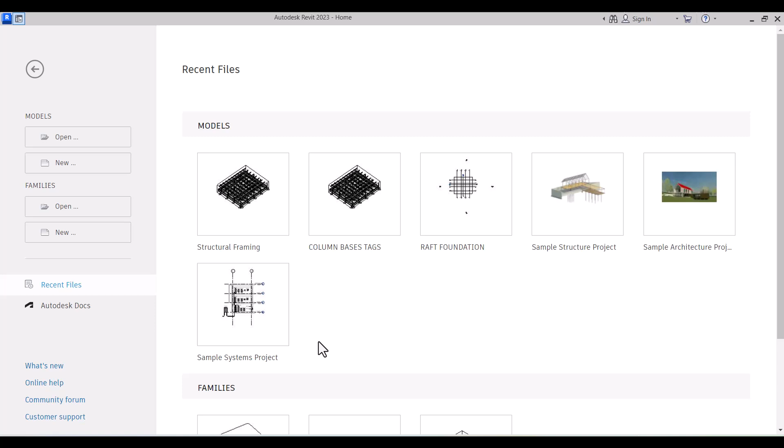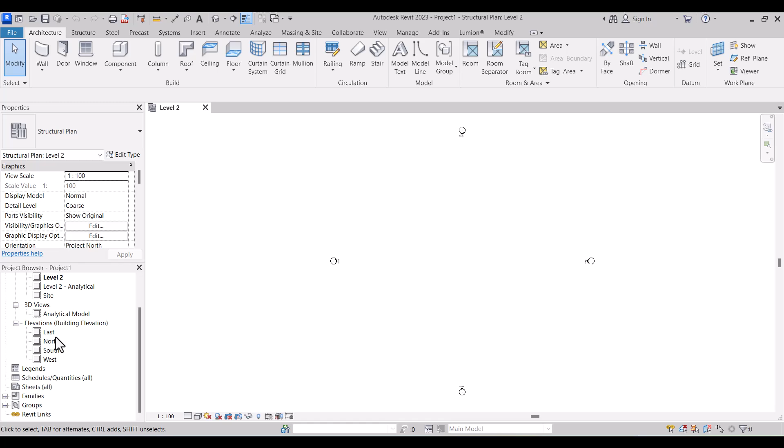Let's move right into our Revit tutorial to see what we have for you today. I'll start a new project using the metric template, which is the metric structure template. I'll click OK and let's wait for it to open.

As a default template, remember we have two levels created for us: level 1 and level 2. We assume level 1 is starting from the ground level, and level 2 is a suspended floor level, which can be a first floor or a mezzanine floor. Today we are going to create a level called the ground floor level.

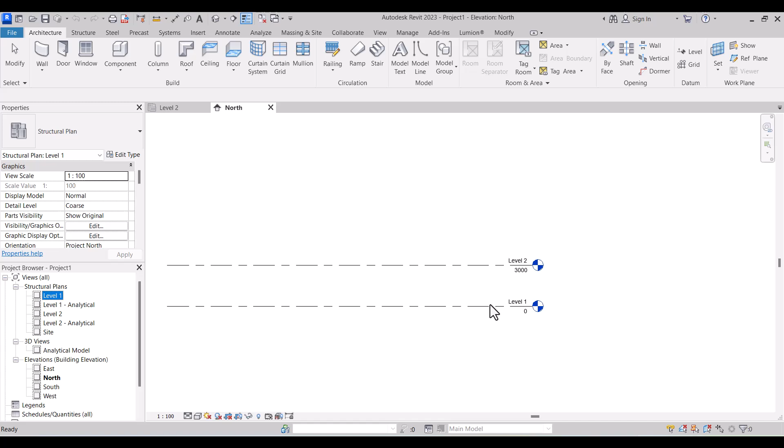So first of all, what is a slab on grade? Let me search this. Slab on grade - simply said, a slab on grade is a concrete slab in contact with the soil. When we talk about a slab or floor on grade, it's simply a floor which is in contact with the soil. We're going to do this and create a section so you know what I'm talking about.

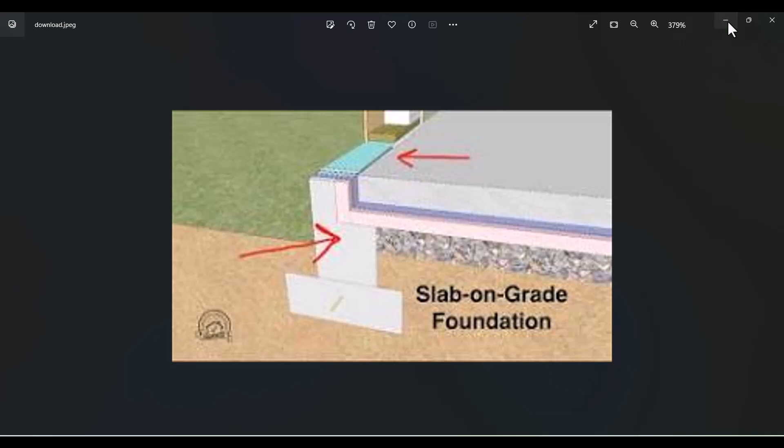Let me check - I have an image here I'd like to show you. So this is an example of a slab on grade with a foundation beneath it. Okay, the image isn't that clear, so I'll move on to create a similar thing in Revit. In case you have a project like this, you'll know how to do it.

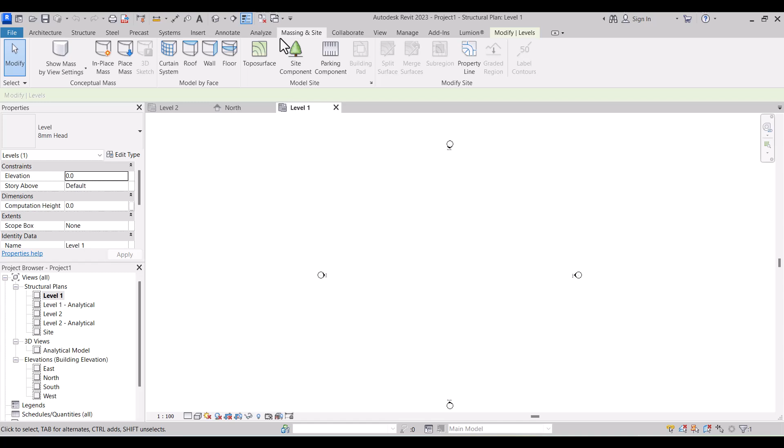What we're going to do first is come to level 1, because a slab on grade is in contact with the soil. So we're going to create a topo surface under Massing & Site. Come to topo, then we pick somewhere here. So we hide our category, which is the topo, and we have our topo there like that.

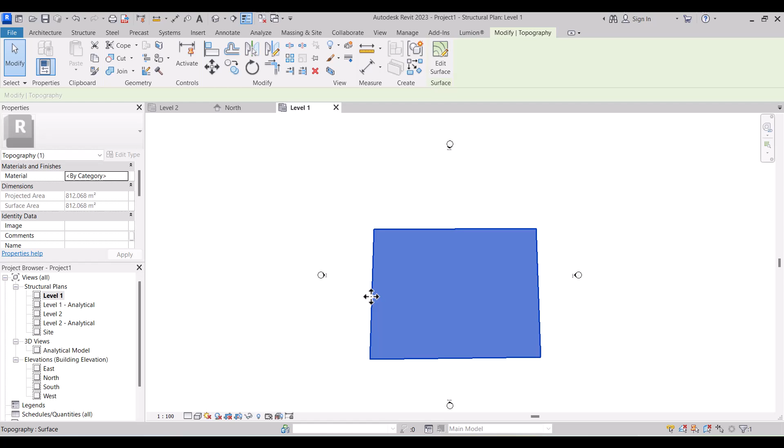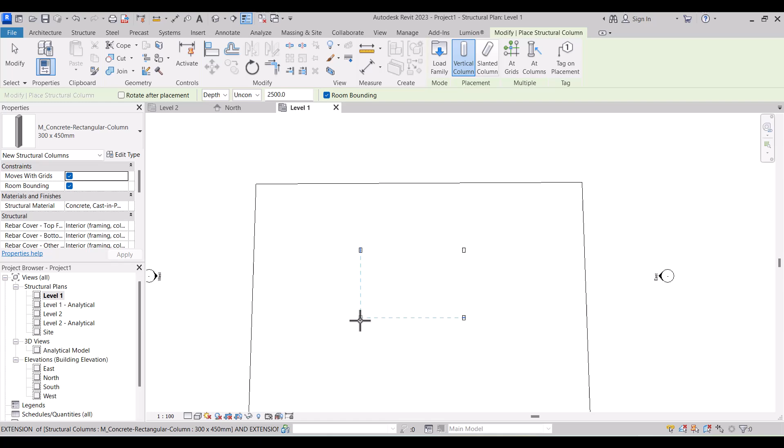The next thing we're going to do is create maybe 4 columns around. I'll pick a structure column, and select a 300 by 450 column as a default. After doing this, I'm going to come into my 3D view as we normally do. So this is what we have - let's see if we can have our topo in there.

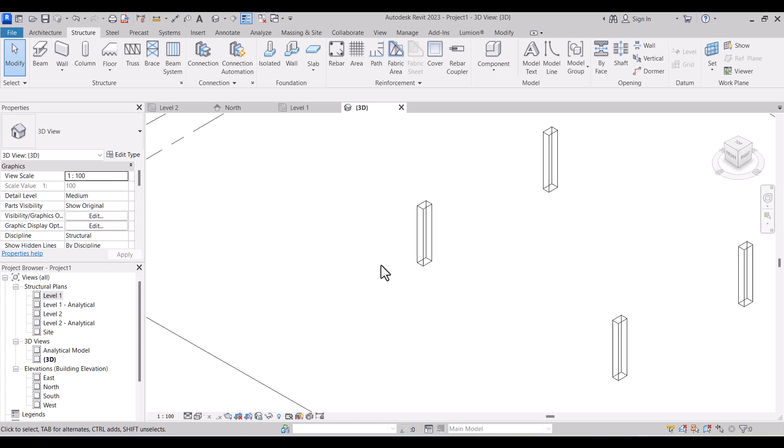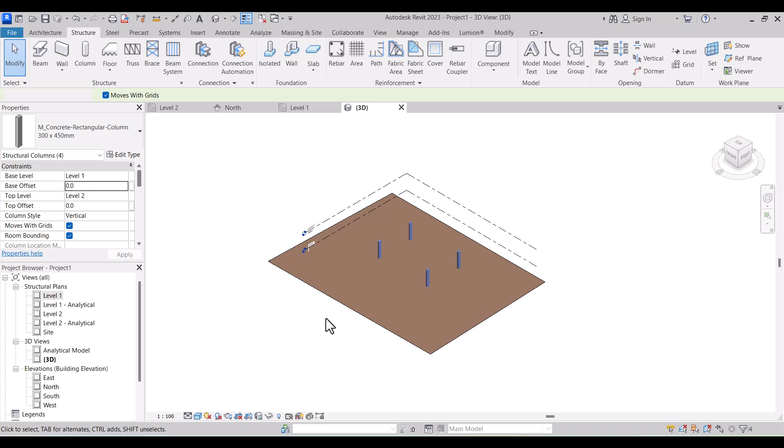We change this to shaded. Let's select our columns placed at level 0 and level 1. First, let's change the top level to level 2 before we change this one. Okay, so doing this, we are going to create our slab on it.

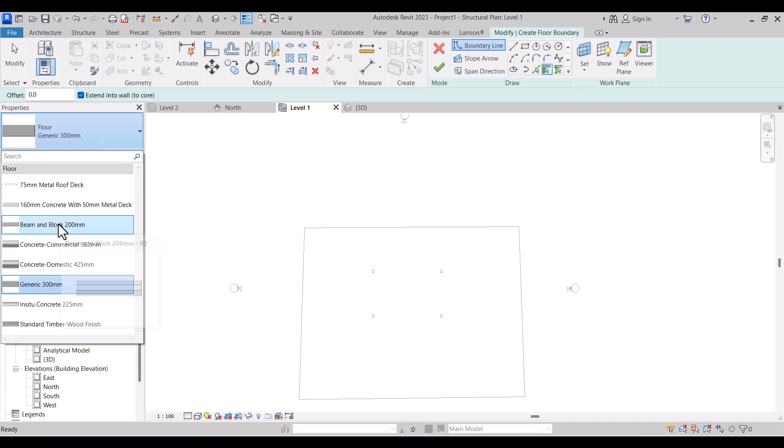I'll come to the structure tab, and under the structure area, I have floors. I'll click here and pick structure. You can see we have a series of floors here. I'm going to go to edit type at the properties palette, and I'll come to duplicate, so we create our floor, which will be slab.

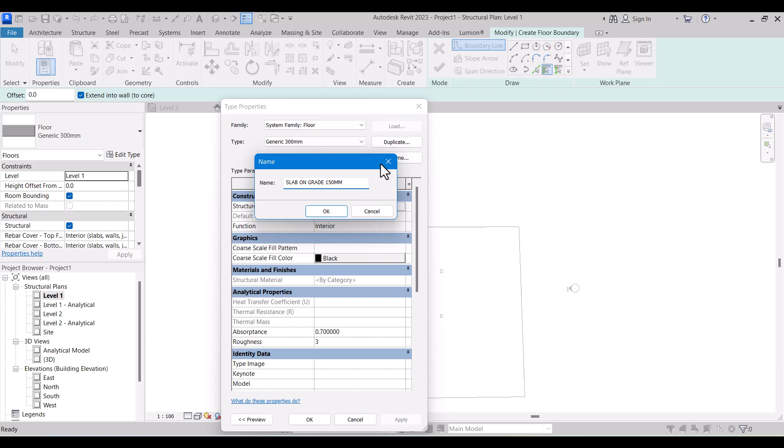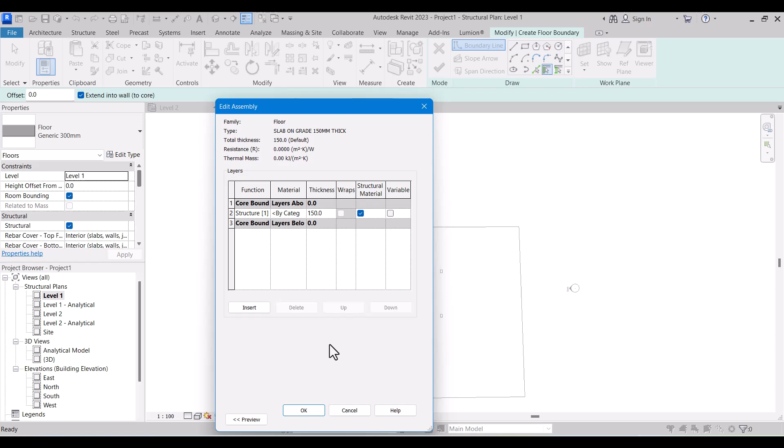Grade, 150 mm thick. Then we change the thickness from here, which will be 150. On the core boundary, we maintain the structure here as well, or the function. So we do OK. Better still, we can also change the type of material we want to use, but we're not going to do that one today.

So these are the drawing tools. We can use the pick lines. We have lines here, we have rectangle here, we have polygons here. So any other thing you want to do, you can use. I'm using a rectangle section.

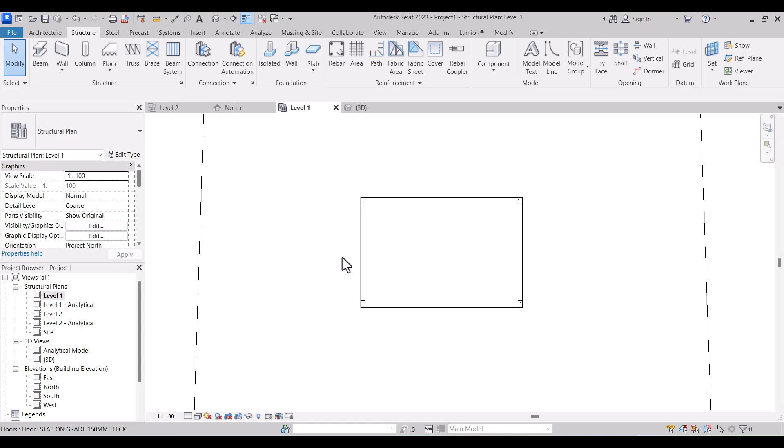Rectangle section, so I'm going to take a section through my slab like this. And we are going to send our slab 150 above the topo, which, as the definition says, a slab on grade is a concrete slab in contact with the soil, so it's in contact with the topo.

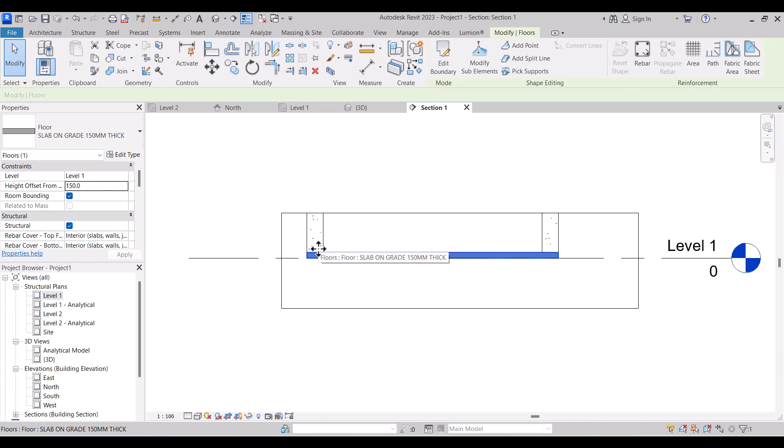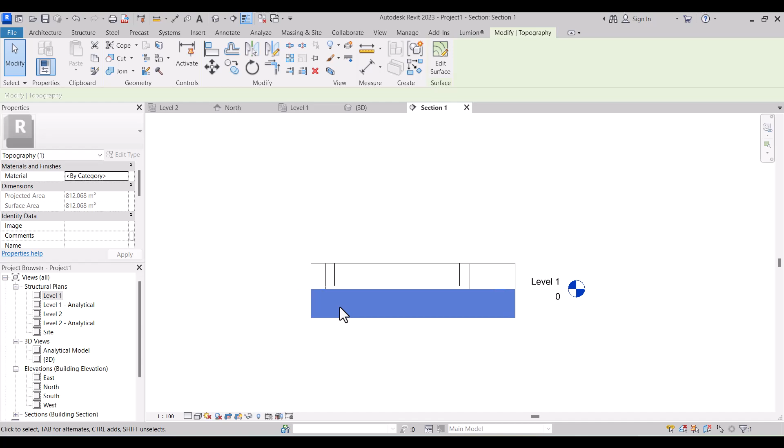So I'll come to my section and my visibility graphics and check my topo here, like that. Okay, there we have it. So I can change this one into fine.

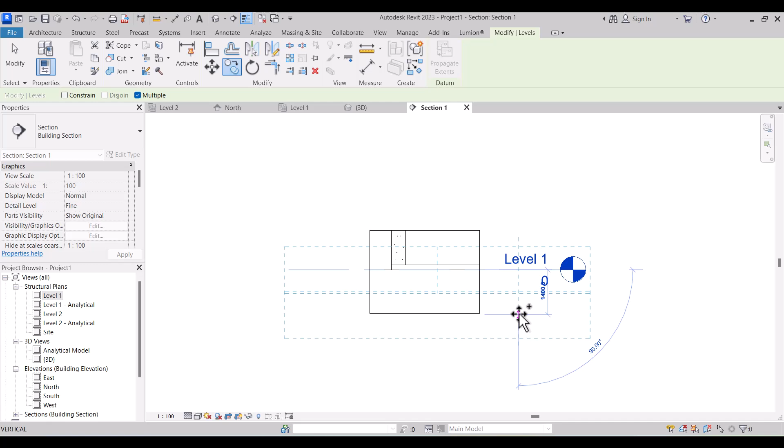So we are going to create a section, a detail section, in order to show. But first of all, before we do that, let's create another level so that we send our columns there, which will be TOF, top of footing or top of foundation.

I'll come to my 3D again, select one column here, right click, and change the base level to TOF, top of foundation. Okay.

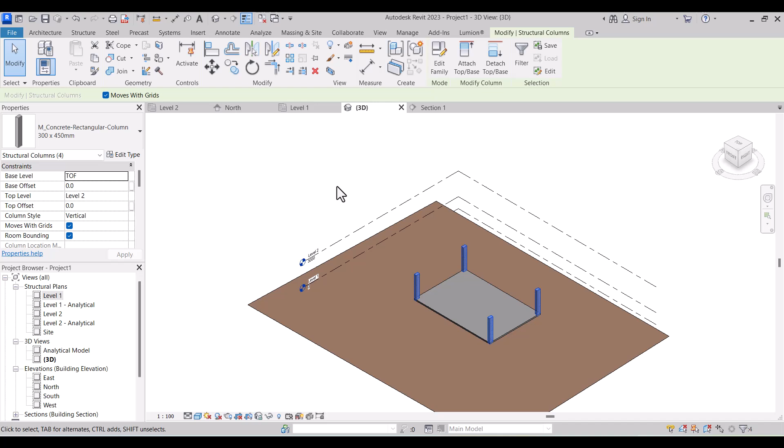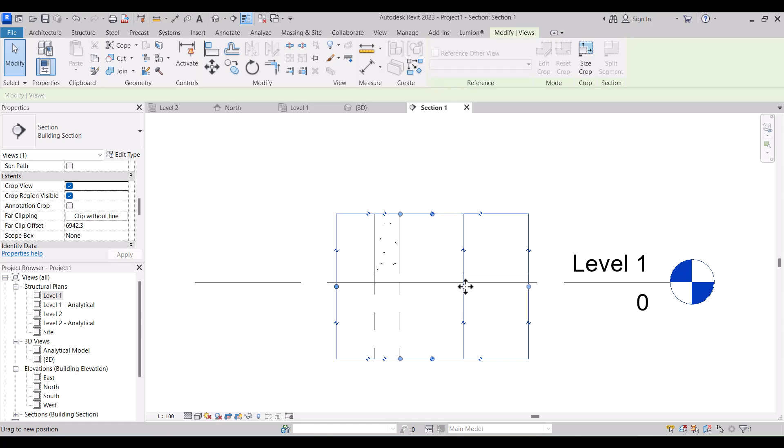So I'll come back into my section in which I took it. You can see the column has been shown in hidden lines, telling you that the column is beneath the soil, right?

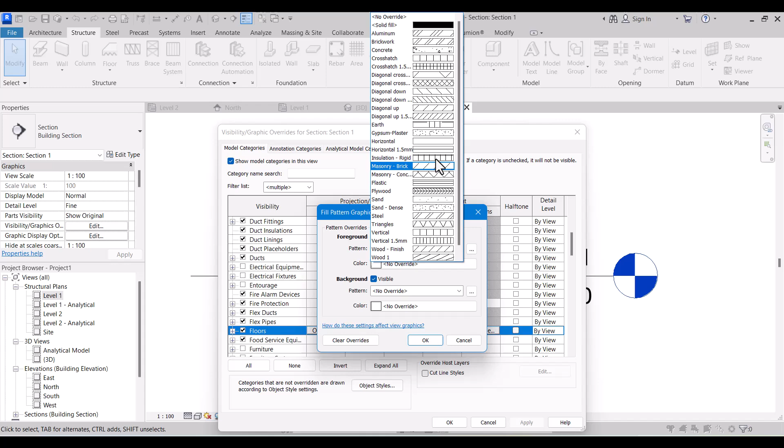Okay, so what I'm going to do is go back to my visibility graphics from here, and I'll look for floor. Under the floor section, I'll look for cut pattern, change this one to concrete, and the color is going to be black.

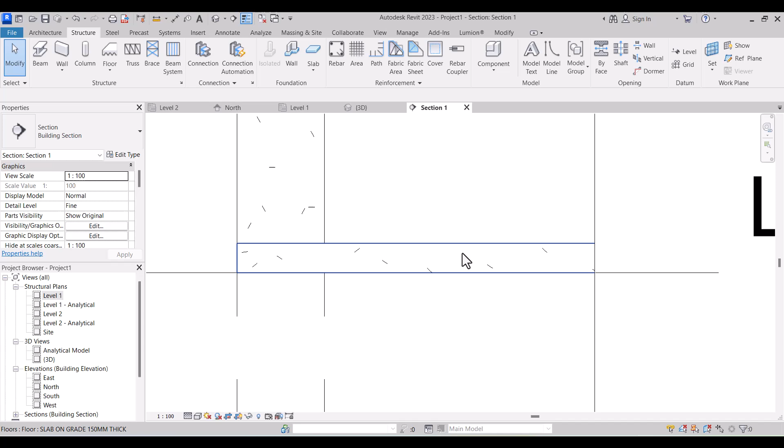So there we have it. But I think I have to do it solid. Solid will be okay. So back to my visibility graphics again.

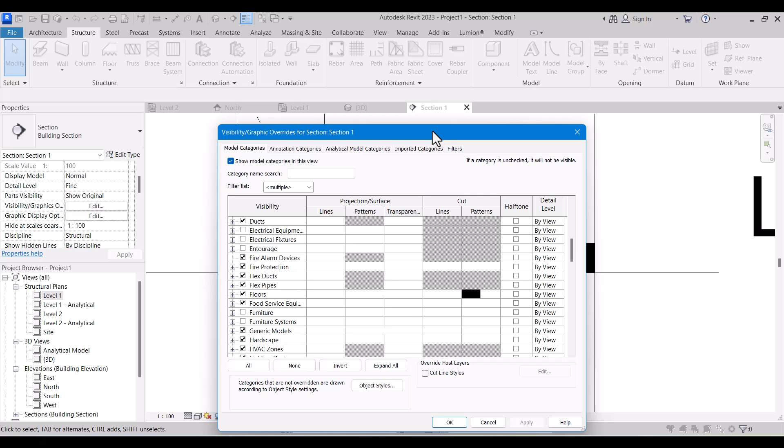Okay, for now, so we are going to use a detail line to create our waterproofing membrane.

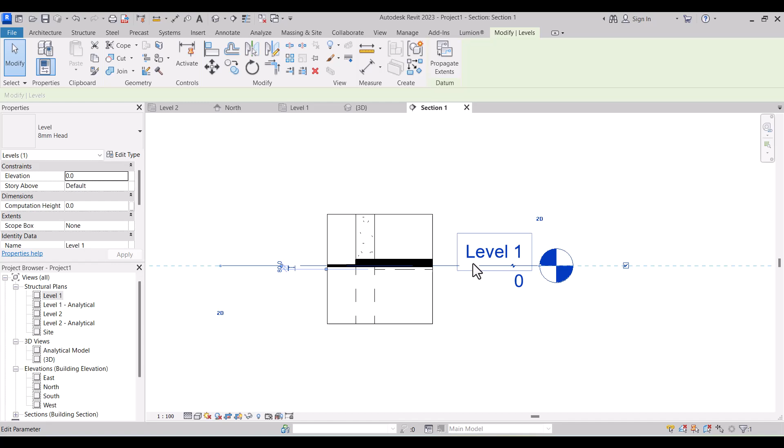So in reality, we have to select the topo. Let's see something.

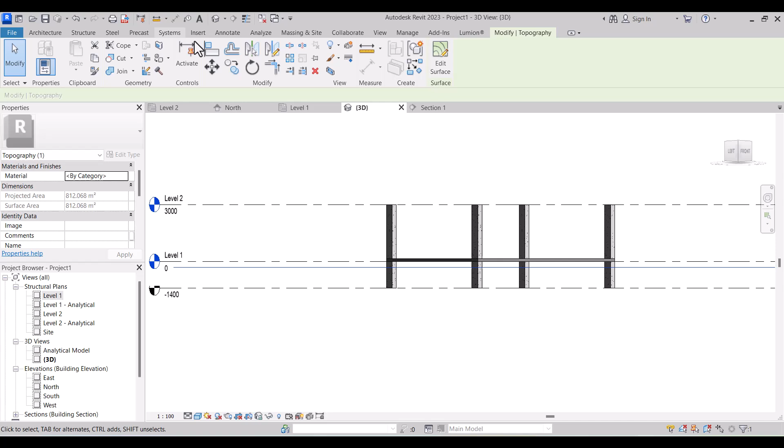Move it 150 up. So with this, we are going to create a hardcore filling.

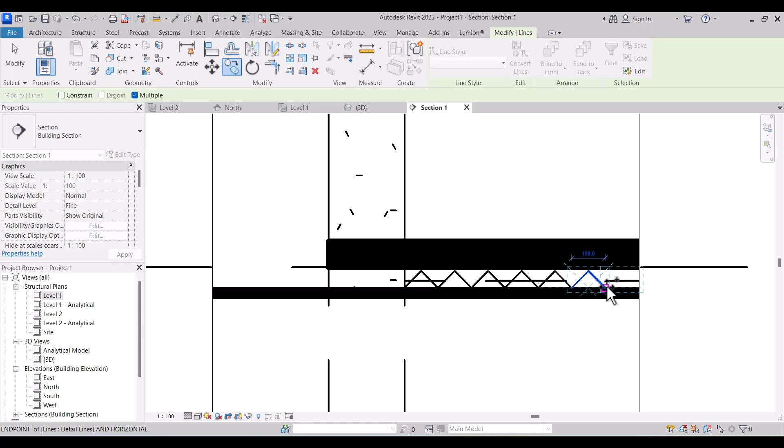After that, we are going to use a fill region to create a solid hedge. So I'll come to this and edit type, and I'll do duplicate and do it, and I'll change the fill region to edge section.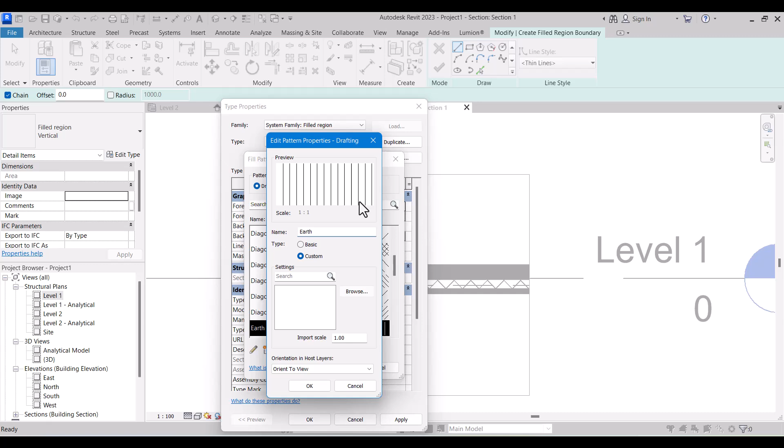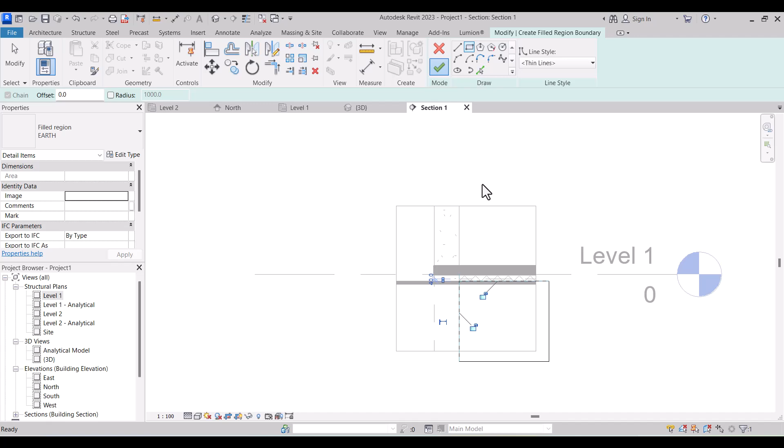Angle from this side and draw something like this. Because this is going to be our section, I have to also copy the earth somewhere here.

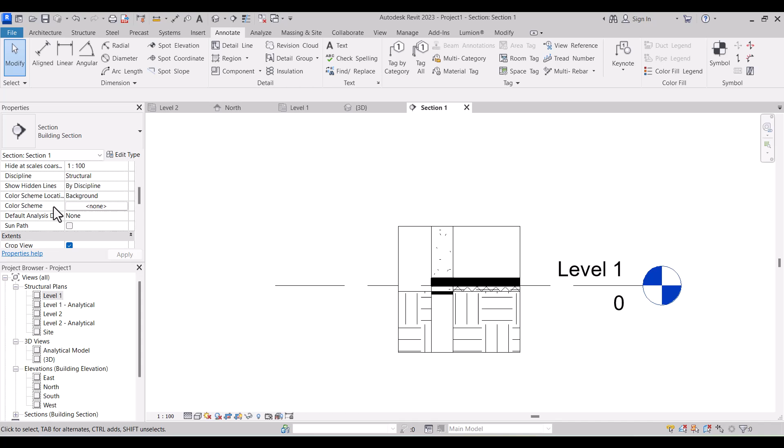And check this one. So we are going to label what we've done. So this one is going to be our concrete slab.

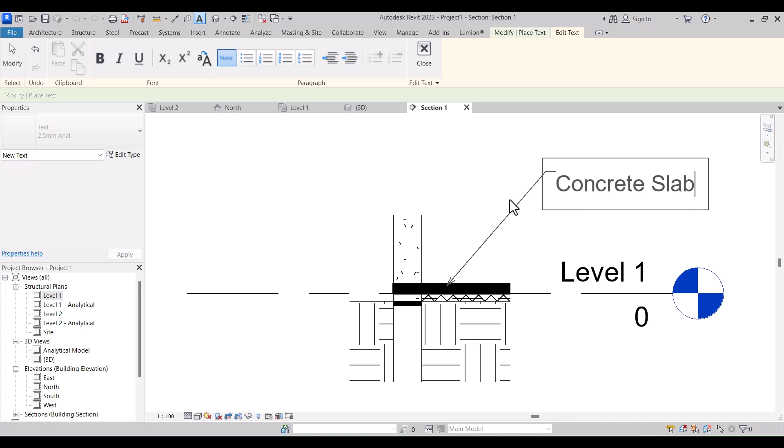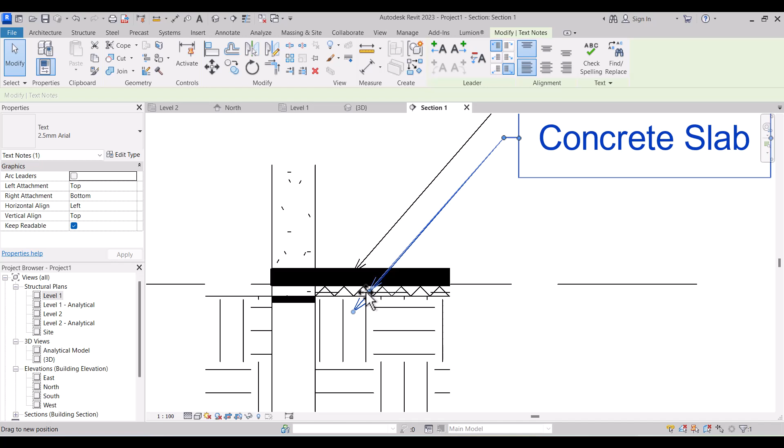Select the level here and check this one rather. So you select the text in which you just did, then you point the arrow to the waterproofing membrane.

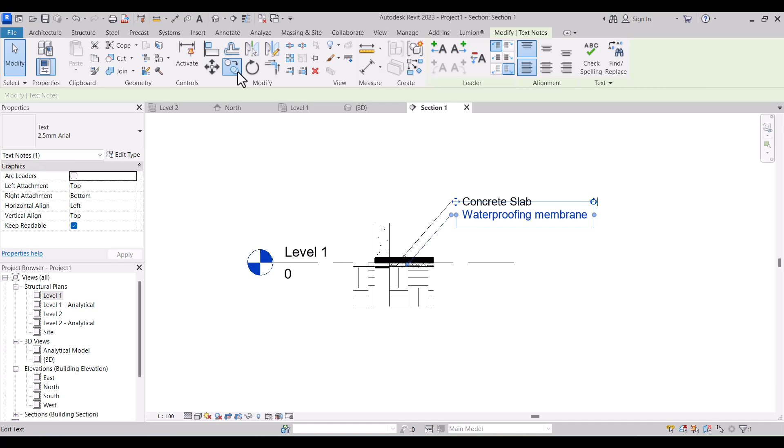This is going to be our hardcore. This is going to be our earth.

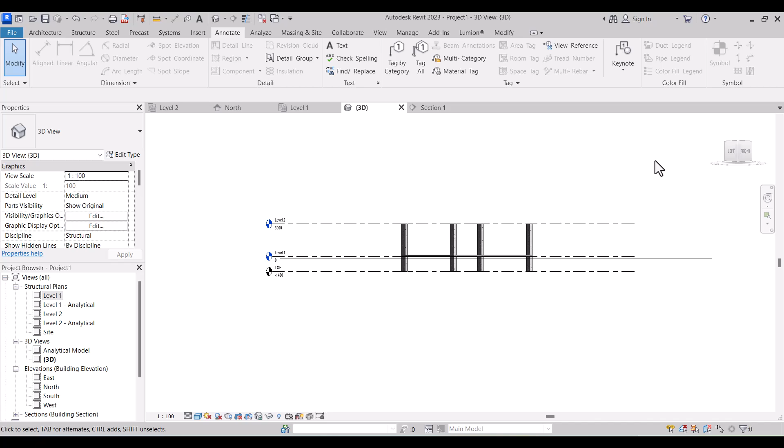So this is how to create a floor slab and a slab on grade with a section.